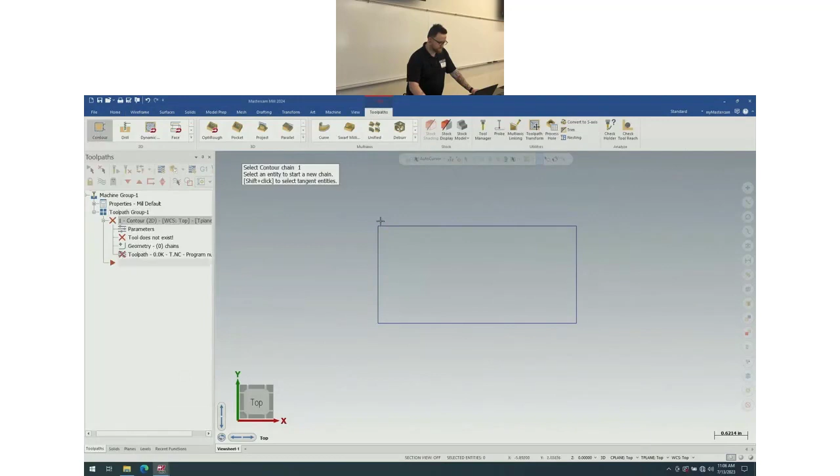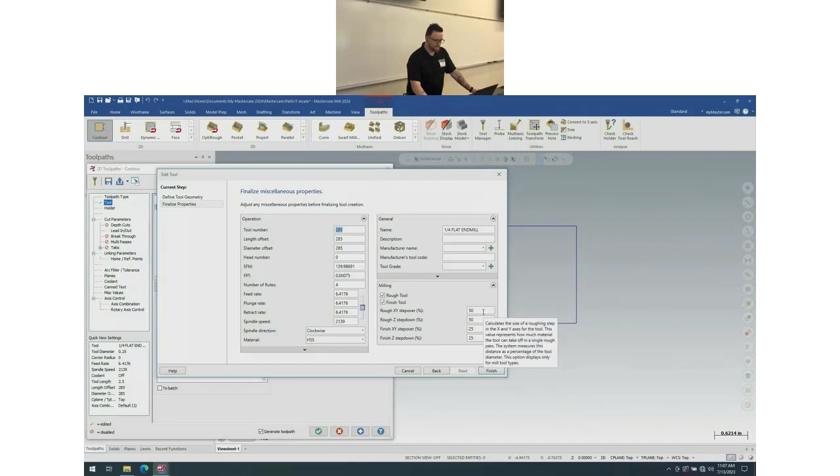Now for our tool, I'm going to grab a tool from the library, and this will just be a regular end mill, 1/4 inch. Now, if I look at the definition of this tool by going to Edit Tool, on the next page, in this lower right section, we have a couple checkboxes to tell it whether we want this to be a rough or finish tool, or both. And we can give it values for our rough XY step over, a rough Z step down, and then our finish XY step over and our finish Z step down. And this is as percentages of the tool diameter.

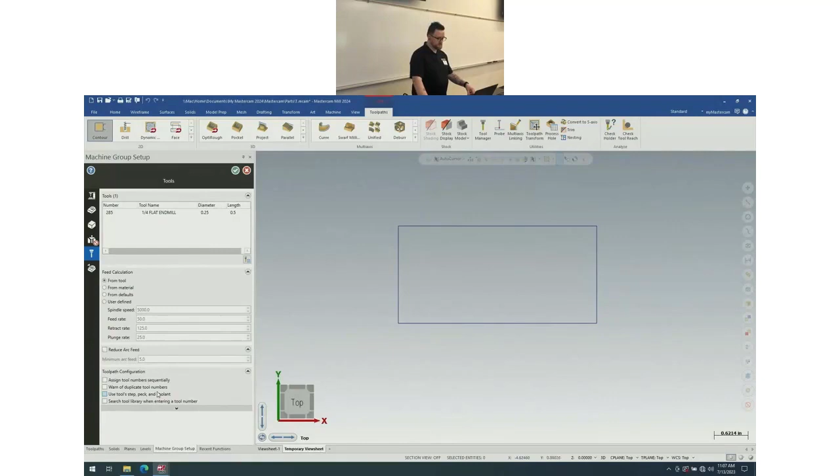Now, the reason that's important is because in our machine group properties, if we take a look in the tool settings, which is the second subgroup, that'll take us into job setup or machine group setup. And down in this lowest section, there's a checkbox here for use tool's step, peck, and coolant. So when you have that turned on and you have your tools all predefined in a library, you can pull lots of information in just from picking your tool.

So when you're setting up a tool library, consider setting up your tools in a manner where they're very specific. You don't use a general 1/4 inch end mill. It's which 1/4 inch end mill. What cut length does it have? Which manufacturer did it come from? What coating does it have on it? What material is it defined for? By having it down to that level, you can really dial in exactly what the settings should be for that tool. And in combination with this checkbox, you're going to get through your programming quicker.

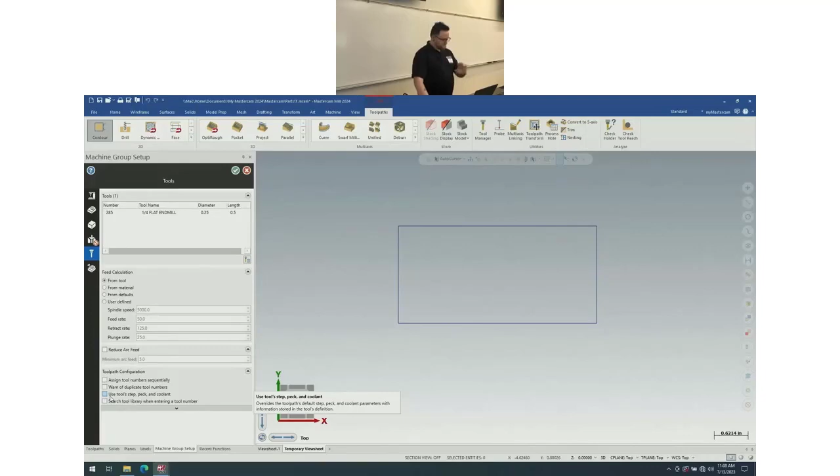Now, that's not new. We're still a minute off from getting to the new stuff, but I did want to mention that because I think it's important. Let's go back to the slides.

The next one is material libraries. Material libraries have been around quite a while, and they used to be pretty popular, but they've fallen out of popularity. The main reason for that is that the point of a material library was to take one tool and adjust its speed and feed based on which material you're cutting. And you did that by adjusting those feeds and speeds by some percentage value. And that worked pretty well when you had a carbide end mill that you used for every material, right? But we don't really do that anymore. That's not how carbide technology has evolved.

Modern carbide is dedicated. You have one tool that's for a fairly narrow band of material these days. You can use it outside of it, but it's not what it's designed for. So with that, I don't really use the material libraries anymore because I've found that just building tool libraries with the correct settings in there is a more effective way to go about it. Now, it's not to say they're useless. If you like that method, you can still use it, absolutely. I just don't think it's as effective.

But we did recently have a customer who had a laser machine. And what's kind of cool about lasers is that depending on how they work, they may not need any Z information. As long as you tell them what the material is, it can set a bunch of things for you. Well, we figured out that what we could do is in the material library, we could create a new material and give it a specific description with specific numbers and letters that are meant to work with that laser. And when you pick that material, it automatically could take that information, pull it into the post, and process it correctly to give that information to the laser.

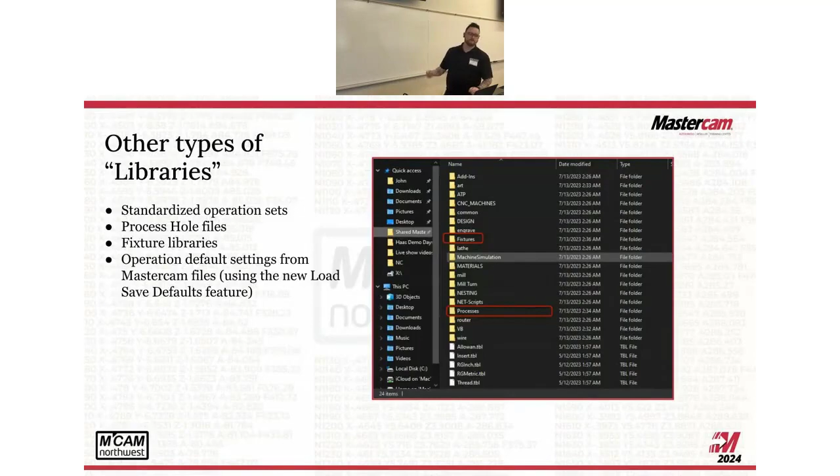Briefly, I do want to mention the Mastercam.com Tech Exchange. Has anyone used that before? No? All right. So the Mastercam.com Tech Exchange is a place you can go to online at Mastercam.com. You go to the community section and you'll find the Tech Exchange in there. The Tech Exchange gives you access to download lots of different kinds of files. You can get sample files so that you can test out things that CNC has tested out for themselves.

You can get tool libraries. These are predefined tool libraries from companies that are very detailed, very nice, fully written out. You can get component libraries. So if you're in a Mill-Turn environment, let's say you need to get a specific model for your tooling block for your machine. We call that a locator in Mastercam. A lot of times you can find those models right on the Tech Exchange. You don't even have to define it. You can just bring it in and use it.

It's great. So the Tech Exchange, while you can use it for full libraries, I don't know a lot of people who actually use a single brand of tool for everything that they do. That's a little unrealistic. But what you can do is if you know that you have some tools from this line of products and a tool library exists for that, well, there you go. Get the library and pull the tools you need out of that one and into your own custom library. Then you don't have to define all those tools, right? It's so much easier. So I think that's really the benefit of the Tech Exchange, being able to find pieces so that you don't have to do as much.

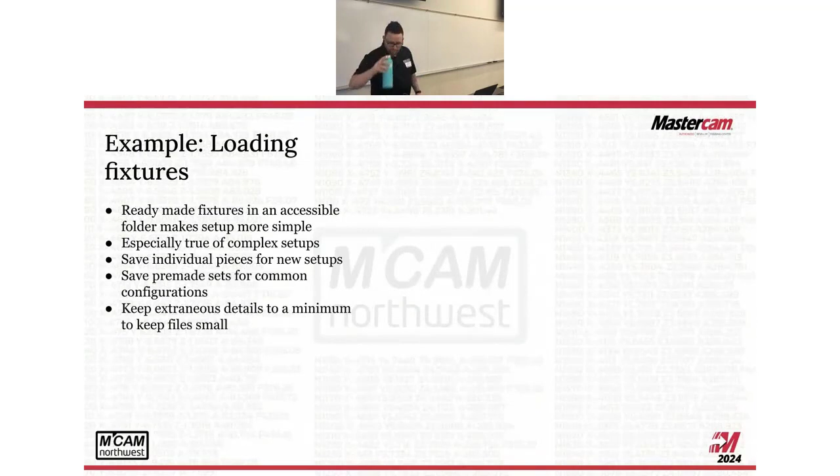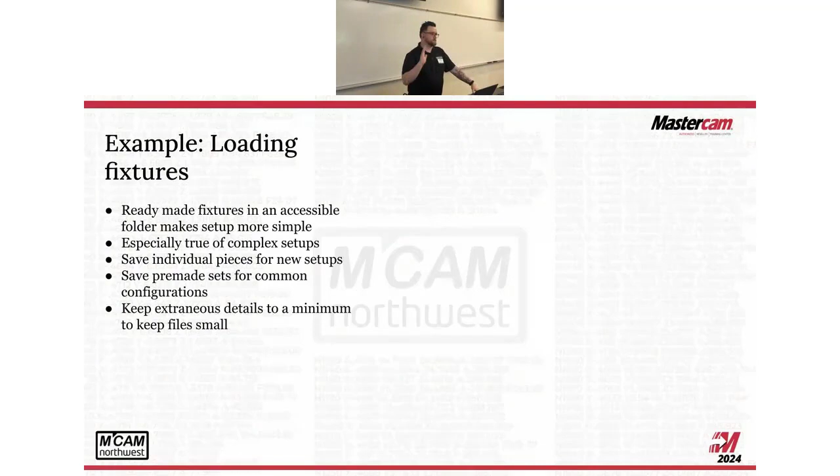So let's talk about loading fixtures. So when we're in the shop and we're making things, we need to put our parts in fixtures, right? Some kind of fixture, whether that's a vise or some custom-made fixture or something, right? But we need to think about the way that we store this information so that we can get to it effectively and use it effectively. So I'll show you the way that I've handled this.

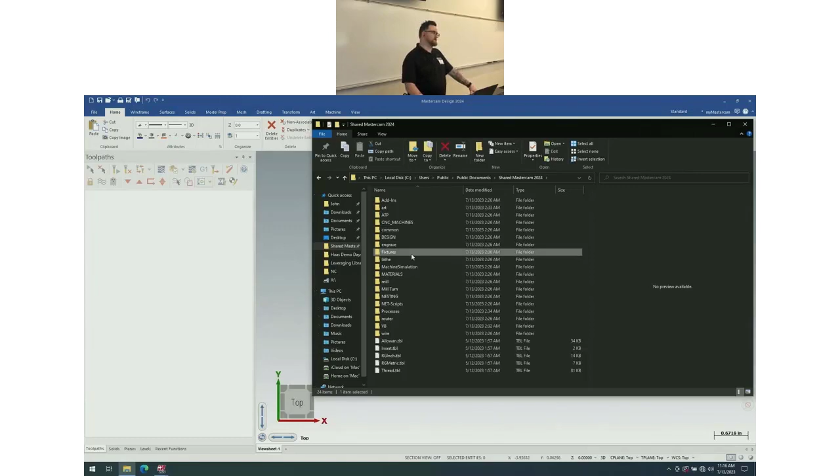I'm going to go to my shared Mastercam folder. And in here, I've got all my folders, and I don't know if you knew this, but you can actually create your own folders inside of the shared Mastercam folder. You are not locked out of this. I've created a folder here labeled fixtures. And if I go into that, I've got a couple of folders here. Now, at this point, this really starts to divide into how do you want to do this, right? But I'll show you my example. So I've got a couple of folders, one's for individual pieces and one's for standard configurations.

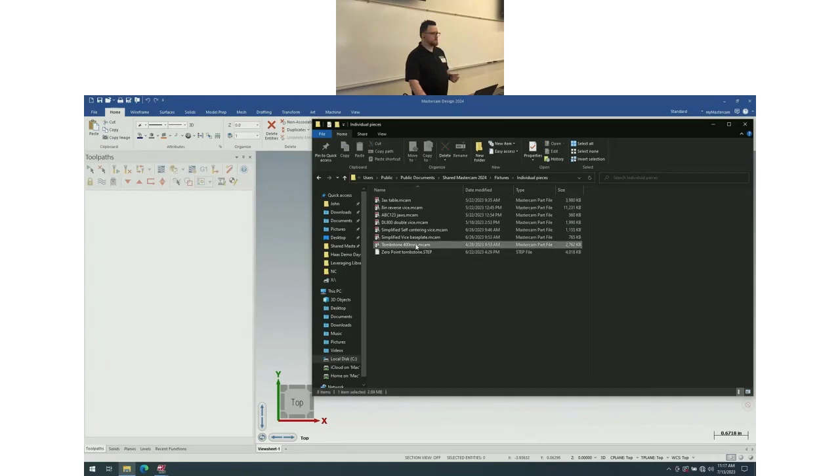So if I look in my individual pieces, I've got several files here. And so I might start with, I've got a new job and I know that I'm going to be working on my 4-axis. So I'm going to bring in my 400 millimeter tombstone. So I bring that in and here's my model. Now, I do want to point out that when you're saving your fixtures, it's a really good idea to try to limit the amount of detail that you have in your files.

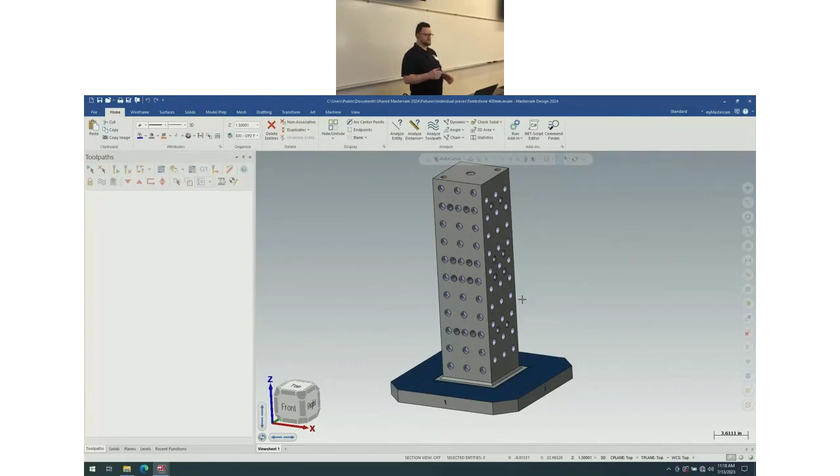Not too long ago, 2 weeks ago or something like that, I put out a tech tip about how that can affect your files. We had one version of a fixture that was something like 15 megabytes. And then the same thing with slightly less detail, but still perfectly good for a collision model, was like a couple megabytes. And it opened way faster. It wasn't 30 seconds, it was 2. So it makes a big difference. Here you can see it's pretty minimal, it's pretty basic. There's probably a little detail here that I could get rid of, but it's how much work do you want to put into it as well. There's a bit of a balance there.

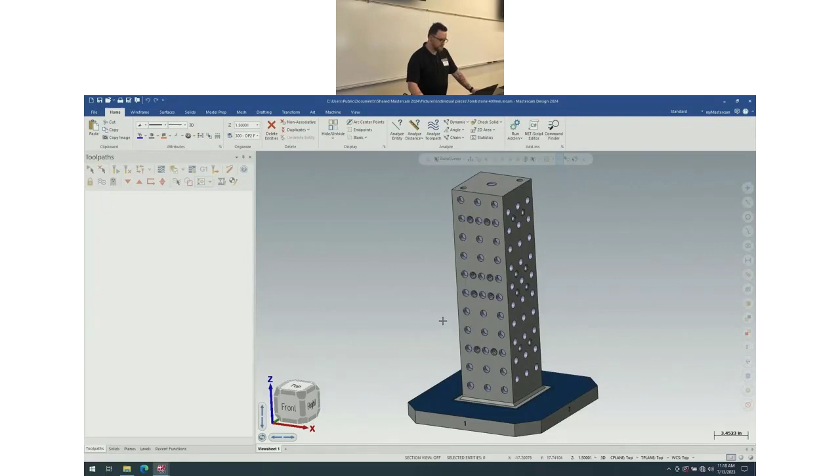So that's my first piece, and then I might want to bring more onto that. So I'll go back to here, and what is the next thing I want to add? Well, I might want to put my vise base plate on here. So I can hold Control, click and drag this down, and that merges my base plate in. Now in this example, I happen to have it in position.

A lot of times it isn't, and you have to move it around, and that's okay. It's not too big of a deal with all these tools we have inside of Merge. But this way, I can grab my pieces quickly and then just put them where they need to go, move them, rotate them, translate them as needed.

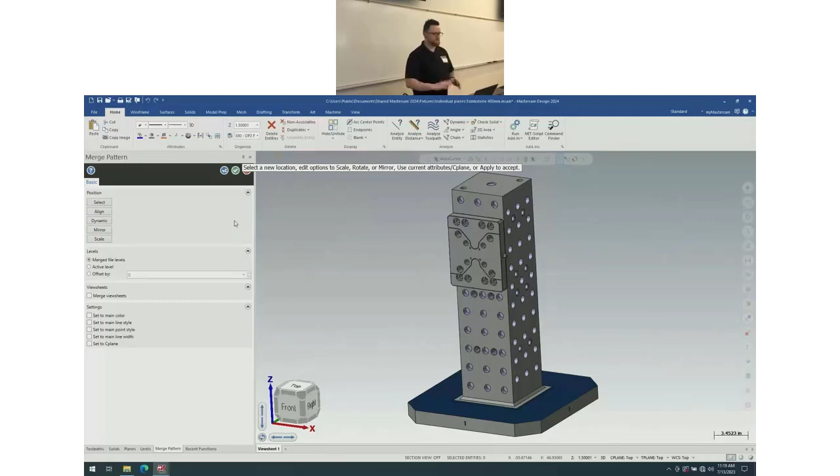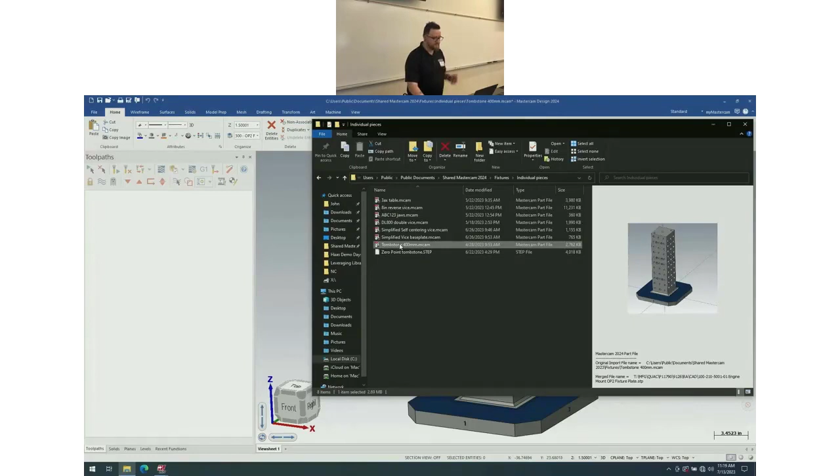So that works well for if we're building something totally brand new that we've never done before with pieces that we own. But if you run the same sort of standard configuration frequently, then save that as a file too. So in my standard configuration, I've got this built. And this file has 8 self-centering vices on subplates on my tombstone ready to go. And this works for tons of different jobs. So it's a good starting point for wherever I want to go.

At this point, I can bring in my model, put it in place, add some stock, and get tool pathing. Everything's ready. You can even go as far as in your planes. I don't have this set, but you could add in planes if you want to, if you have standard ways you like to manage your planes in here. So the idea of a fixture library is to just have your pieces ready so that you can bring them in quickly and easily and use that merge function to put everything in place.

Any questions so far? Are you downloading those things or did you create them yourself? So you asked if I downloaded those things or if I created them myself. Yeah. So it's a mix. Sometimes you can download them and sometimes you have to create them. It really depends on what that company offers. Some companies are really good about putting out excellent quality models that are on size, they're minimal detail, they're great.

Other companies, they'll give you a nice model, but they're really detailed. And then you kind of want to go through and pick those clean. That's what I like to do. Make sure to check out the tech tip that I did to see a little bit more on that. Or some companies either don't offer models, or if they do offer one, it's some horrible STL. And in those cases, you're going to build it yourself.

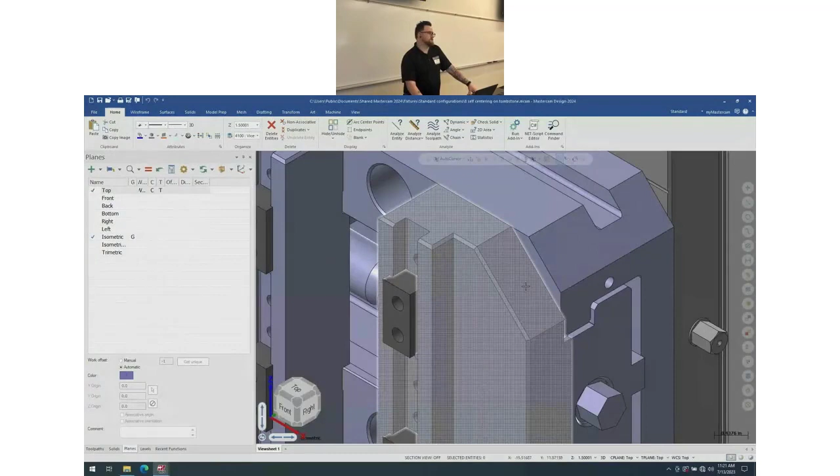But the thing to remember with fixturing is that you want to create a collision model. You don't need this to be perfect. You need it to be size accurate and where it needs to sit so that collision checking works. And that's really it. It doesn't have to be fancy. If this little corner cut right here isn't going to be critical to your operation, don't model it. It's fine. It's too much work. I try to keep everything as simple as possible. Does that answer your question? Yes. Awesome. Cool.

Okay, I think we can go back to the slides. So next up is standardized operation sets. Okay, so let's say that you're working in an environment where you make a similar part on a day-to-day basis. This is something that I resonate with a lot because my very first job as a machinist, I was working in this shop that made what are called wave solder pallets.

These are fiberglass boards that are pressed with resin, and then you cut a pattern out that has a shallow pocket for a PCB, deeper pockets that cover components that are mounted on that PCB, and then it's got through holes where you can have leads that are poking through the PCB, and then waves of liquid solder lap up underneath the board to solder those pieces together automatically.

We did so many of these things, it blew my mind. There were so many. And it was the same product over and over again. It was the same features over and over again, but every design is custom. Every design is unique. So there's a lot of people who do stuff like that, right? Similar work, but everything's customized. So in that sort of a case, I really like standardized operation sets because we can get these sets of operations, bring them in quickly and easily, and then modify what we need to get the output we're looking for.

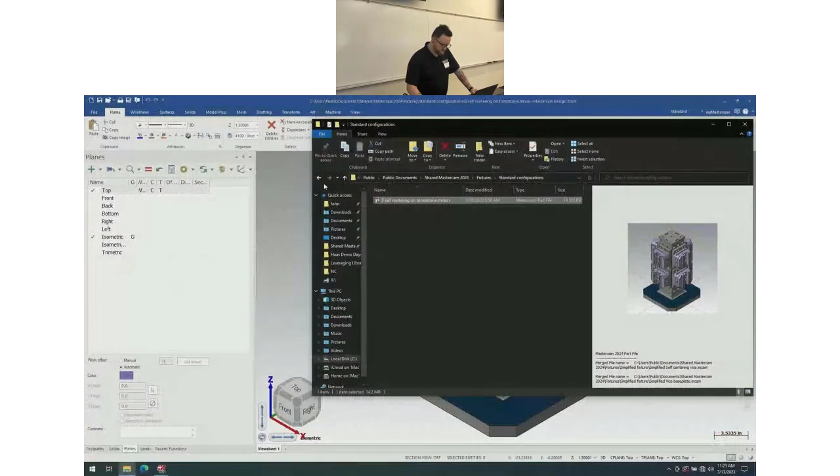And if you have an update to your process, you can update one spot and then everything from that point forward is made with that update. So I think that's a great way to go about it. Kyler, why don't we go ahead and go back to my screen while I find my file.

Okay. Oh, actually, you know what? I need to go here. So this is another example where I've created a folder in my shared Mastercam. I call it processes. And this has my operations set for wave solder pallets. So I'm going to bring this in.

And I want to point out that what you're seeing here is not super representative of what we're actually making. This is the bare bones of what we're looking for in terms of features. That's really it. You don't have to be complicated. You don't need a crazy part to do this. All I knew is that you generally have a shallow pocket that you fill in with the PCB. Great. Doesn't even matter how deep it is. As long as you have an even shallow pocket, it's good.

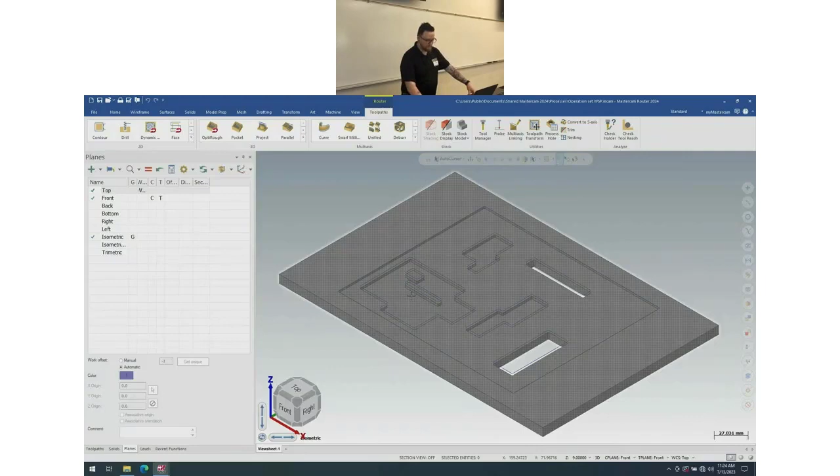Then you have deeper pockets. Some of those have islands. I know the tool sizes that we're using, so I might want to size some of those islands close so that big tools can't get in, but little tools can. And I have through holes. And with those through holes, I also wanted to make sure at least one of them was too small for my largest tool. So this was literally something I sketched out in wireframe in about 2 minutes that roughly approximates the types of features that I'm working with on a daily basis with these boards.

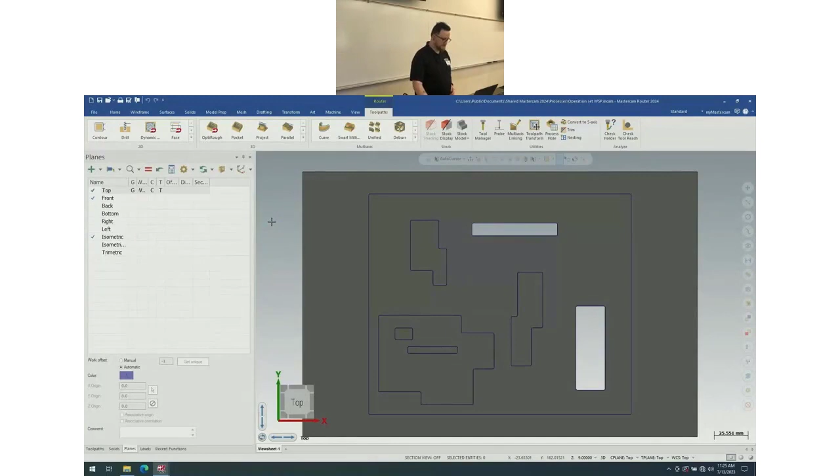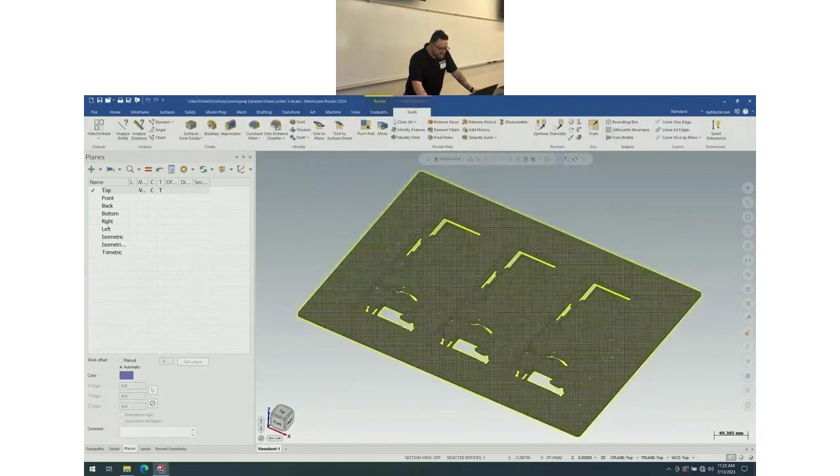So now let's go back to here, and I'm going to pull in this file right here. And this may take a moment to load. There's some data here. All right. And you know what? Let's adjust the color of this. Let's make it a little brighter, a little easier to see.

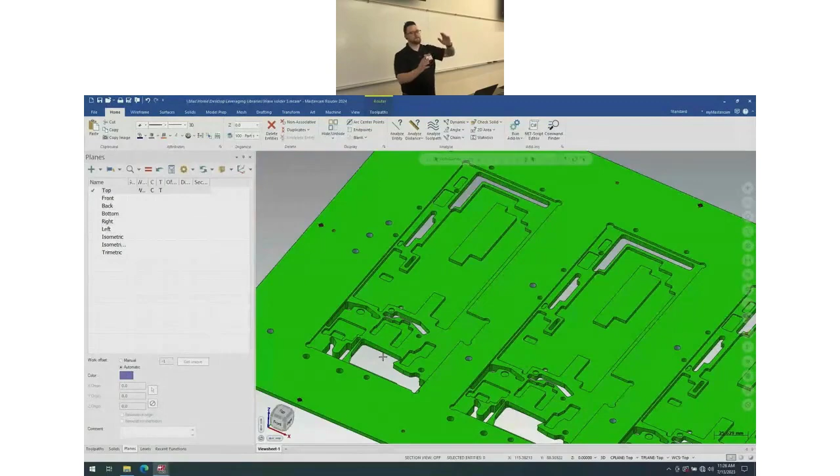So this is a more standard wave solder pallet. I've got a whole bunch of these features, but I still have one shallow pocket, some deeper pockets, some islands, maybe some even deeper pockets, and some through holes. But with the other one that I made and the toolpaths that I made that work for it, we can take those toolpaths from the first file, bring them in, reassociate our geometry, and be done with it.

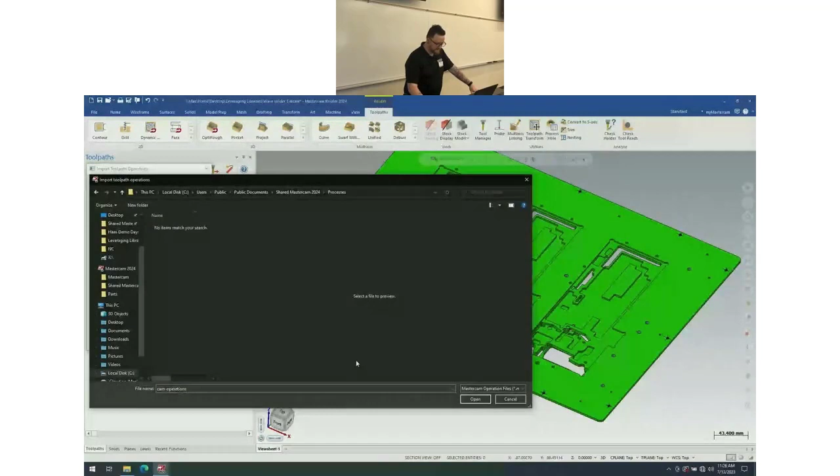So the easy way to do this, let's double check first. I want to make sure our stock is set up. Looks like it. Great. So I'm going to right click and import. I'm going to go to my shared Mastercam folder, find my processes folder. I have to switch my file type to Mastercam files, and then I'll find my operation set, and then I'll bring that in.

Now, I'll be clear. This is not a new thing. We've had import for ages, but I'm showing you a way that you can use this as a library to make it effective for you. I'm going to grab all those operations, hit the blue plus, say OK here, and close.

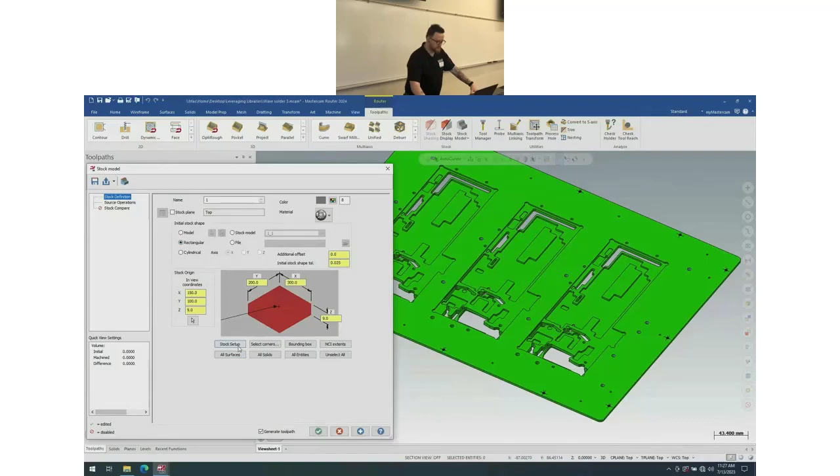Now, because I'm familiar with it, I know that the first thing I'd like to do is update my stock model to figure out the starting size of it. I want it to match my stock setup. So I'll say rectangular stock setup, green check. And it's going to give me an error because my previous toolpath isn't finished, and it depends on that. That's OK. At this point, I'll go into the geometry of my first OptiRough.

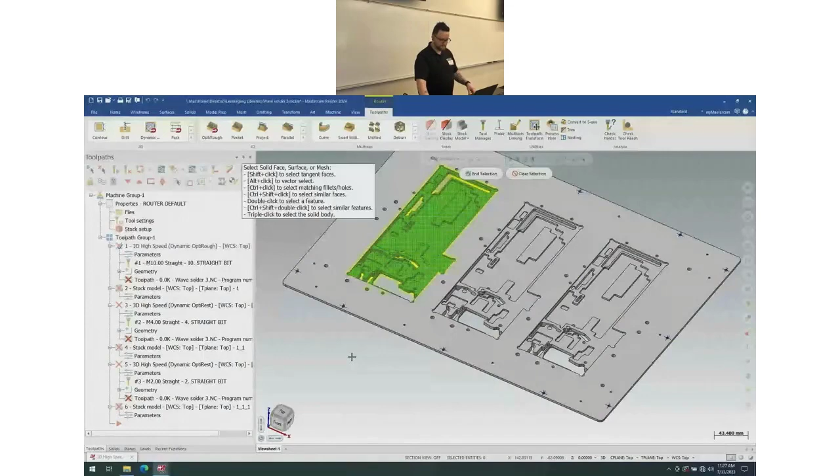I'm going to select entities, and I'm just going to double click this pocket. Because it sees that whole thing as a feature, it grabbed everything inside of that pocket for me. Then, under toolpath control, I'm going to add a boundary chain. And that's just going to loop around the outside, just like that.

Everything else in this toolpath was preset from the other file. My tool has been pre-selected, my speeds and feeds are ready to go. It's got everything it really needs. So if I hit the green check, that's going to regenerate, and it will create the operation that I need for that pocket for roughing, right? The first initial rough. And there we go.

There's some things it can't get into because the tool's too big, but that's what these other ops are for. I've got this one. It's an OptiRest with a smaller tool that's based off of this stock model.

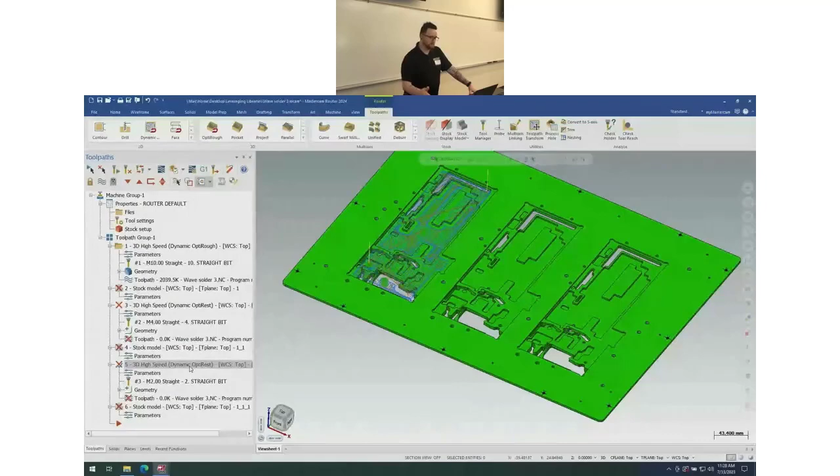Then another OptiRest with an even smaller tool that's based off of this stock model. And the reason I stop here is because this tool I know is small enough to hit all of the smallest radiuses that are put on these parts on a regular basis. So with that, I can just hit regen all dirty, and it'll take a moment because this isn't the fastest computer in the world. But, oh, I did forget a step.

Oh no, I forgot a step. Here we go. So I'll show you what I did wrong. The other toolpaths still need their geometry. The good thing is you can actually right click and drag the geometry from the first operation to the second one, then click on replace geometry. It will bring in the machining geometry and the control boundary. I'll do the same thing to the last one because they're all going to use the same geometry, and then regenerate.

Now it's working. So what I like about this method is in a few steps, I can have all of my roughing done for any board like this, right? It doesn't matter what the specific board is.

It doesn't matter. Shelly, could you get that over for me?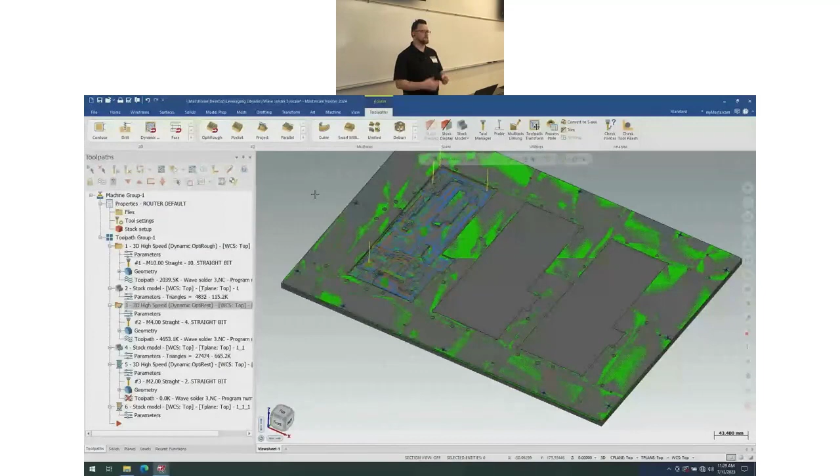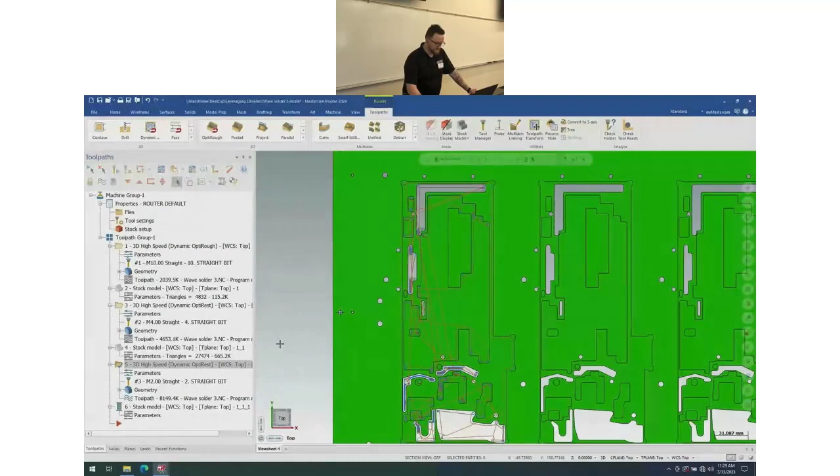It doesn't matter what the specific dimensions of this are because I know how the parts behave overall, right? I have a standard flow for how I work. We know what the standard types of features are. So we have our 3 here. There we go. So from our top view, we've got our second tool that comes in, cuts everything that the bigger tool couldn't get, and then again with an even smaller tool. So by the time that stock model's done, we're ready for finished contours, pop a couple holes in it, and we're done.

So with a quick computer and some good operations preset, I could probably have this entire board programmed in less than 10 minutes. So I think that's pretty good, right?

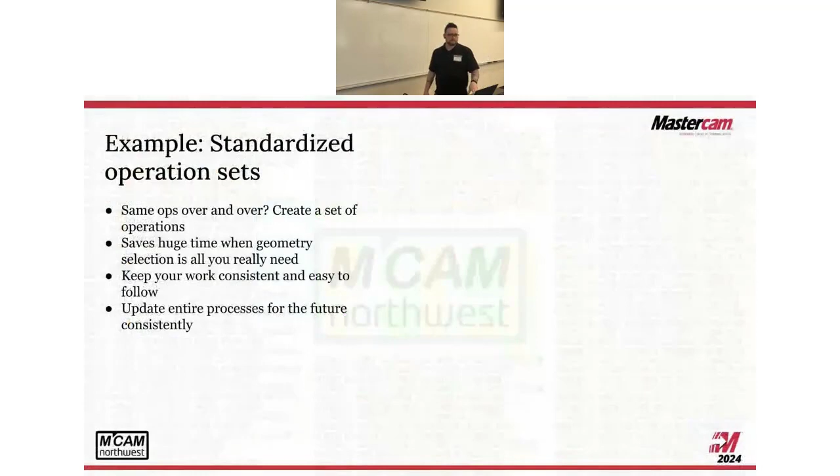So next up, loading saved defaults. So this is a feature for Mastercam 2024. And like I was saying before, loading your defaults is something that we've been able to do, but now we can load defaults based on other files. And that's really cool. So this is kind of like import, but it's a little bit smoother, and we don't have to go do as much searching, especially if we have some pretty standard files that we're using for our starting points.

So if you have known good settings for your approach, you know what tool you like, you know what kind of speeds and feeds you like, you know your step overs, your step downs, all that kind of stuff, your pattern options, all of that can be preset. And I'm going to show you an example for Mill 3D, but this works for anything. This can work for multi-axis, this works for mill turn, this works for turning, this works for wire, doesn't matter. So yeah, fantastic time savings on this, and I really like this interface. So I'm going to show you guys how this one works.

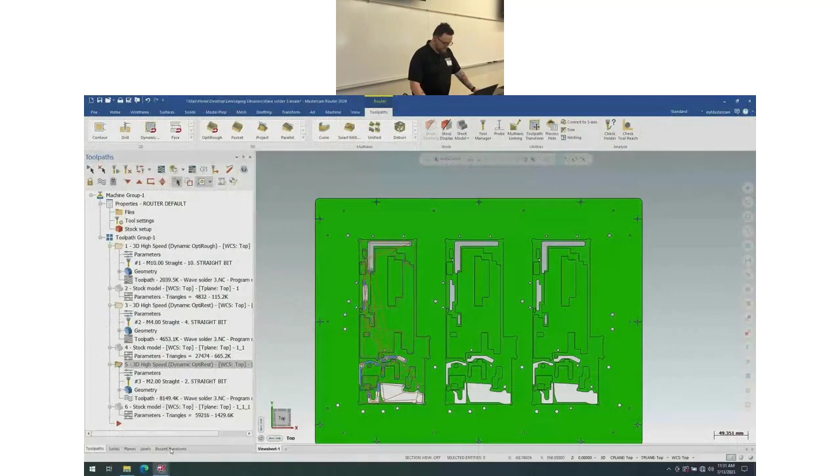All right, so I'm going to bring in this file. So here, all I've got so far is a part in a fixture, and I've got a stock model on there just to give me kind of a starting point. And what I want to do first is do an OptiRough from this orientation right here. So I'm going to start an OptiRough toolpath. Now, before I do anything else, I'm going to come up here, and this button right next to the floppy disk icon allows me to choose a file to load my defaults from.

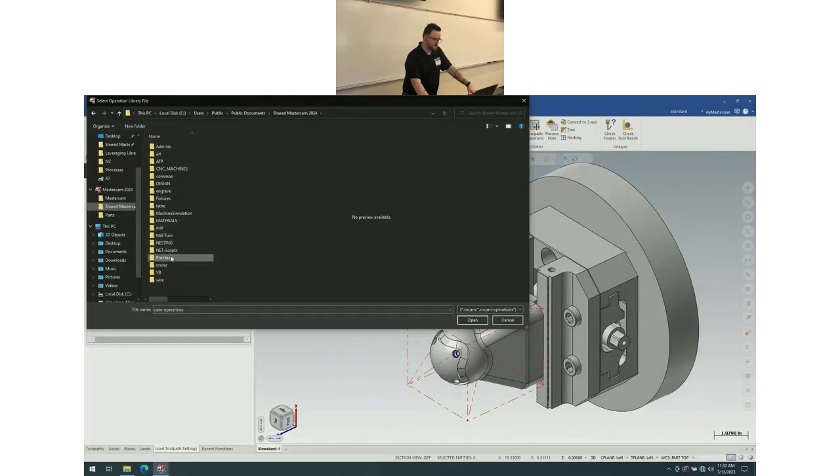So if I click that, we have a radio button selector between default or custom. So default is going to pull the default values from your operations default file. But if we select custom, we can pick any .mcam-operations or .mcam file. So even a standard part file. So I'm going to change my selection here. I'm going to go back to my shared Mastercam folder, go to processes, and grab my, oh, actually, you know what? I had this in a different spot. Here we go, default parameters.

So when I load that in, what this did is it found any operation that was an OptiRough that was in that file. And with that selected, it says, what do you want to do? So here I have 3 possible settings. I have OptiRough standard with stock. I have Opti large step down, small step over, or Opti large step over, small step down. So these are different toolpaths that I built in the other file for standard approaches that I like to take for this type of work.

So with that selected, I'm going to choose the first one, OptiRough standard with stock. When I click OK, this has changed every parameter in this toolpath to match that other one. All we need to do is make sure to double check our tooling. So this is going to use a 3/8 bull end mill. And then we need to reset our model because it won't select your geometry for you. Otherwise, it's the exact same toolpath from the other program, right?

That's not very useful. So we'll make our selection. We'll triple click here. I'll probably want to add some avoidance as well, just in case. And steep shallow, I'll probably want to add this in too. Now this is something you could add into the default parameters. If you know that you do this type of work frequently, add steep shallow in as one of the options. I'm going to set this to just go halfway down the part, call it good enough. Everything else in here is fine, and I should be able to just regenerate.

All right, I think that I made a mistake because I tried to push it through without the stock, and it did not like that. That's okay. So we can pop this through again. Again, what's really nice is once I've selected it once, I can hit this drop down, and now I can just pick my options here. So if I wanted that option, select my model. We'll just use remainder, actually. There we go. It's easy.

Set up our stock. Double check our tool. Looks good. Yeah, it likes that better. There we go. There's the little circle. Bottom of the stock is above maximum depth. Yep. Okay, and that's fine.

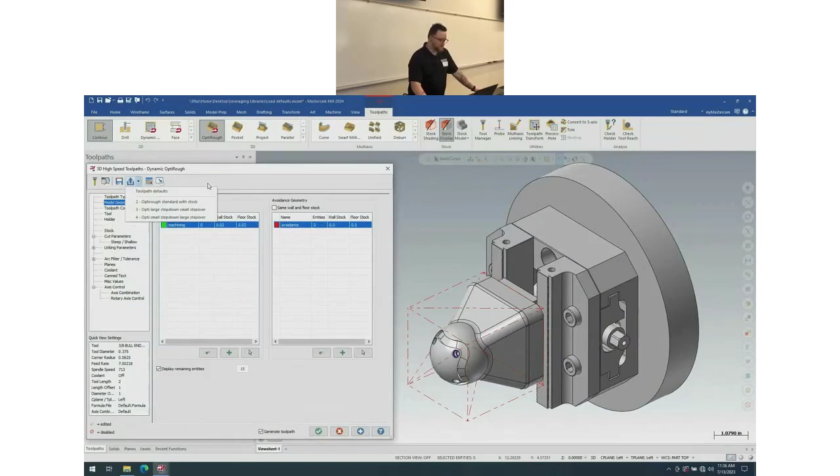So this is a way to quickly bring in all of those settings, right? And what I like about it is, again, being able to just select a different way to do this, really nice, because instead of having to create a new operation or having to fiddle with every setting, I can just go in here and pick a different one. And that's even true of an existing op. So once this is done processing, I can go into my parameters and say, you know what, I don't want to do this with an end mill. I want to do this with a high feed tool.

So in that case, I might choose small step down, large step over. So I'll pick that. And now all of my settings are different. My cut parameters, I've got a much bigger step over here. My step down's tiny. I can choose my different tool, my high feed tool. It turned my stock off. So maybe that's something you like. And then you just make sure to reset the model geometry. That's all you really have to do.

So that's the gist of how loading saved defaults works. And I think that if you take the time to really set this up in a way that benefits you, then you could save a lot of time. There's no magic bullet with this. I can't give you a file that has all of the strategies because it's useless, right? It only works if you set it up. You have to take the time to do it.

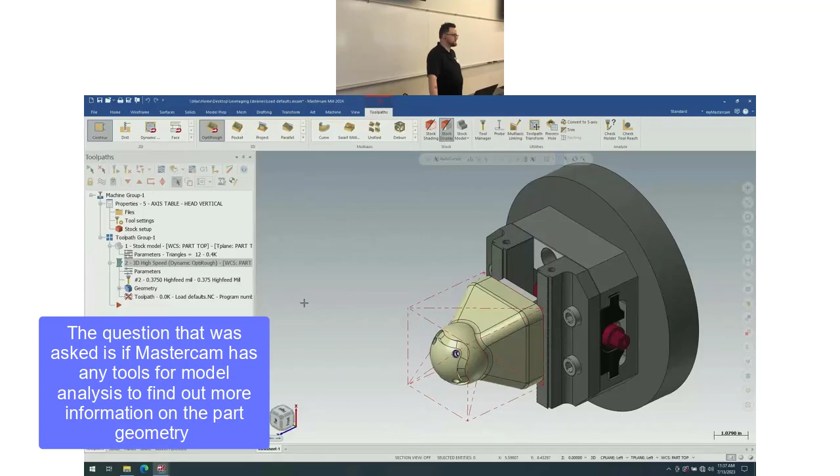In regards to that, I use a lot of templates, but part of the problem is figuring out what is the smallest radius on the model, what are some of the features. Do you have any model analysis to figure out what is on the part? Yeah, there are some tools within Mastercam that do that. So we have in here,

let's see, so dynamic is a little bit manual, but we do have things like analyze draft angle. So if you're looking for what are the draft angles of my part, you can use this, and from a given plane, it can tell you what those draft angles are. So that can be useful if you're trying to figure out, should I be using a tapered tool or should I be stepping this up, right? Do I have a tool that works for this?

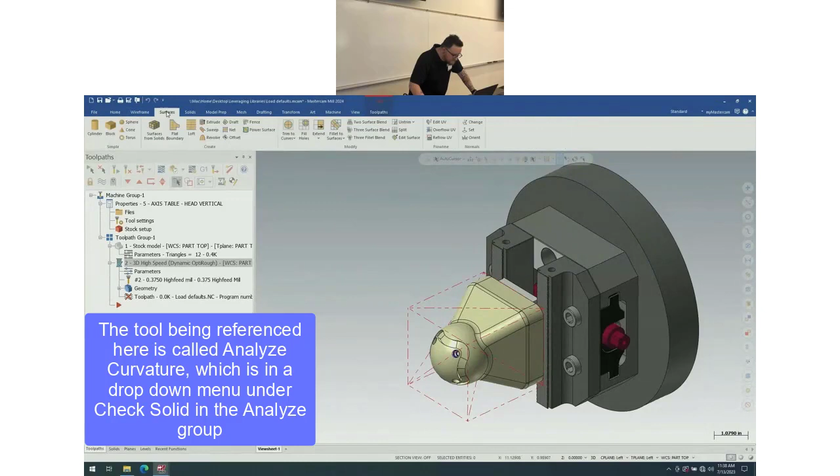There's also some other tools in here that allow you to do things like find the smallest fillets. Yeah, that's a good one to know. Yeah. So let's see here.

I don't always remember all of these tools myself, I'll be honest with you. Yeah, that's something I use a lot because it's nice to have the templates made, but if you don't know which one to implement, are you just clicking through templates? Right, exactly. No, it's good to know what is going on with your particular model. So I do know that there's tools for this. I just can't remember where they are. If Tim happens to be watching, he might put something in the chat and we'll go back over it. Otherwise, I can reach out to you by email afterwards or put this in the recording afterwards as well.

All right, Kyler, if we could go back to the slide deck. I think we're just about to wrap up the examples here. There we go. Process hole. So process hole is another new feature for Mastercam 2024. And it allows us to take a hole that is defined as a solid hole, so not an extrusion, and we do need to have the history on that. We can take that, and with that information, if Mastercam knows what that definition is, based on another file and the same definition of a hole, we can bring in a process. That process can include multiple toolpaths, which I really love.

That means if you're making a hole for a socket head cap screw, and you need to spot this, then you need to drill it, then you need to take an end mill and do your counterbore, and then you want to take a chamfer mill and pop a small chamfer on top. That's 4 operations. As long as you save that as a process within Mastercam, whenever that same hole definition comes up, you can use this tool, say, pick this hole, go, and it will add all 4 of those operations automatically. It doesn't even matter if they're at different depths. It can account for all of that because it knows the solid history.

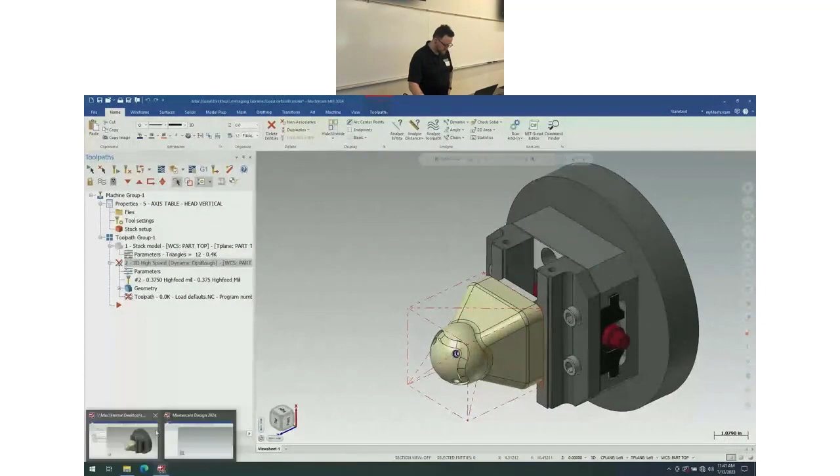So with process hole, I will say that in terms of getting programming done, it's probably the fastest tool out of all of these that we've seen today, but it's also one that takes the most heavy lifting to set up. It is definitely a bit of work, but if you have any standard holes, this is golden. Absolutely wonderful. And does this work with most file types? Like a step file will also be able to use process hole, or is this only for things that have history essentially on the build? So your question was, does this work with any kind of file or does it need to have history? So it does need to have history. However, just because it came from another system doesn't mean you can't have history. You can add history to a model.

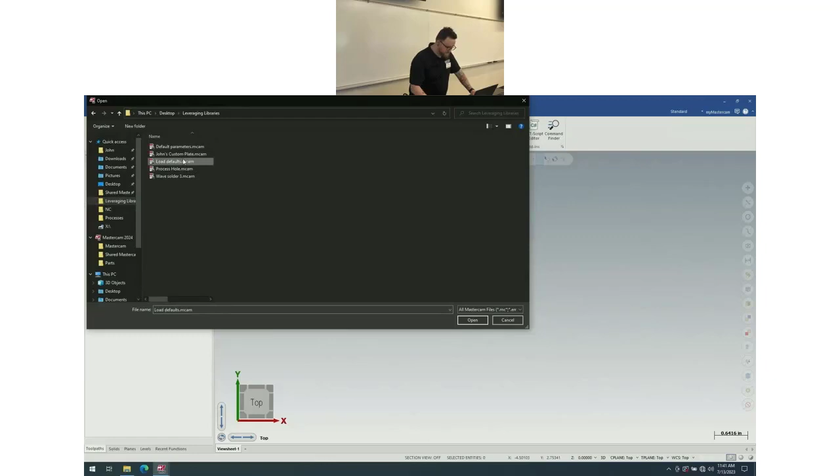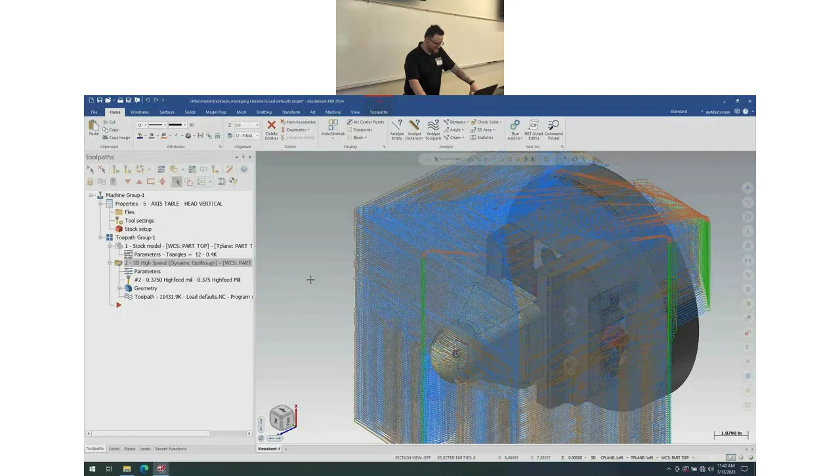So Kyler, if we can go back to my screen for a sec here, I am actually gonna kill one of these Mastercams and go to the other one. All right, so I don't actually want to open that one yet. I'm going to open a different one here. I want to go back to that file we were just working with, because this even works in multi-axis, which is pretty cool. It's the analyze curvature tool. Analyze curvature. I don't know where that is, but there is Command Finder. Oh yeah, that's where I screwed up. That's why it was taking forever. I forgot the steep shallow.

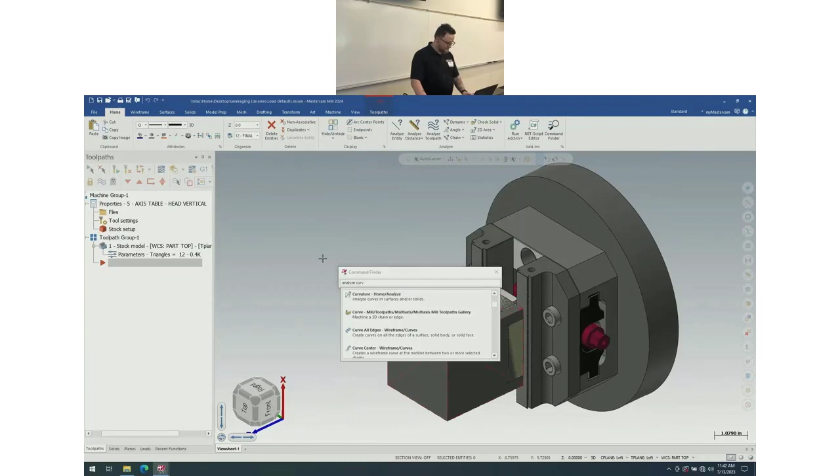Yeah, analyze curvature. There is a command finder. So if we go in here and go analyze curvature, should be in here. Here we go, curvature, home analyze. So that is something that could give you like your fillet sizes, for instance. All right, so kill that.

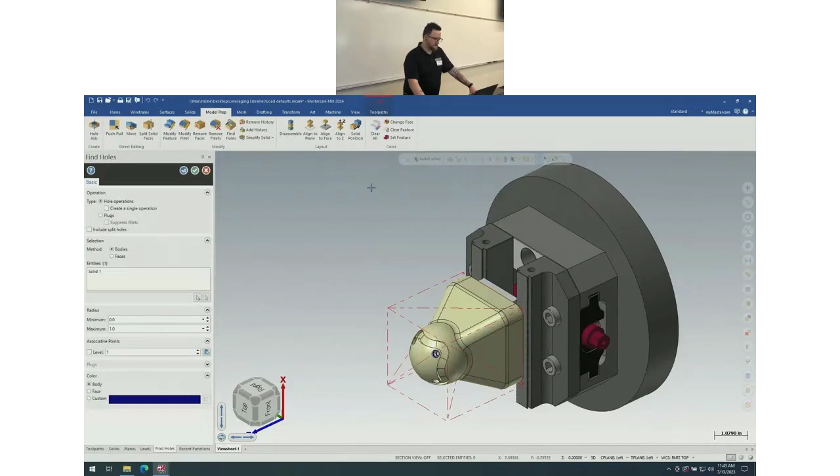So let's say we have this part here, right? Let's go take a look at the solid, and the solid body itself. Which one is it? It's probably quite low on the list. Okay, so this is the body for this part, and there's no solid history here. This is a dumb solid. So this could have been brought in from another system, could have been an STL, whatever. So from the model prep tab, you can go to this feature for find holes.

Then we're going to select an entity to find holes on, and selection here. And then up here we have some options. So we're going to create hole operations. You have an option to create a single operation. This means if you have multiple holes that fit the same definition, then you can combine them into a single history operation.

That's really useful if you have like an array of holes that are all the same. That way you don't have them all separate and, oh, I need to make a change to these holes, let me do this one at a time, right? That would be awful. So this lets you combine them. So in this case, we have like 4 holes, the front, these counterbore holes.

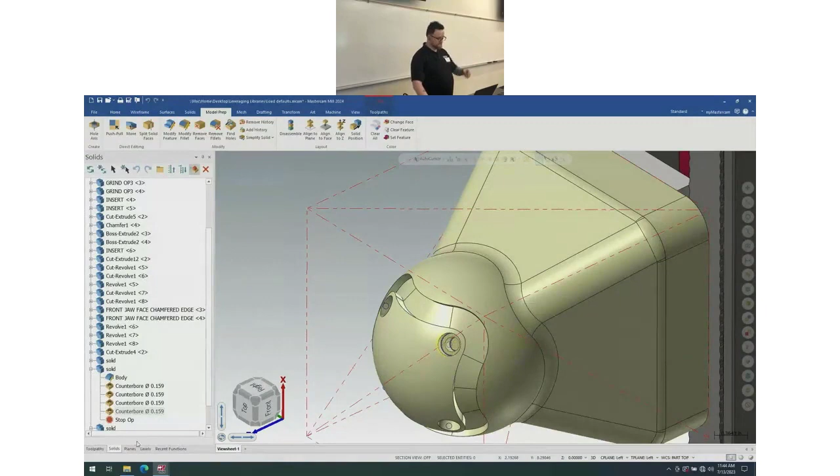So I'm just going to let this run. And it found 4 holes detected in the body, right? So now I have these 4 counterbore definitions. I can double click into them, and they act just like a normal solid hole function. So if you are working on a model that doesn't have any history, that's the tool you want to use first.

Does that answer your question? Okay.

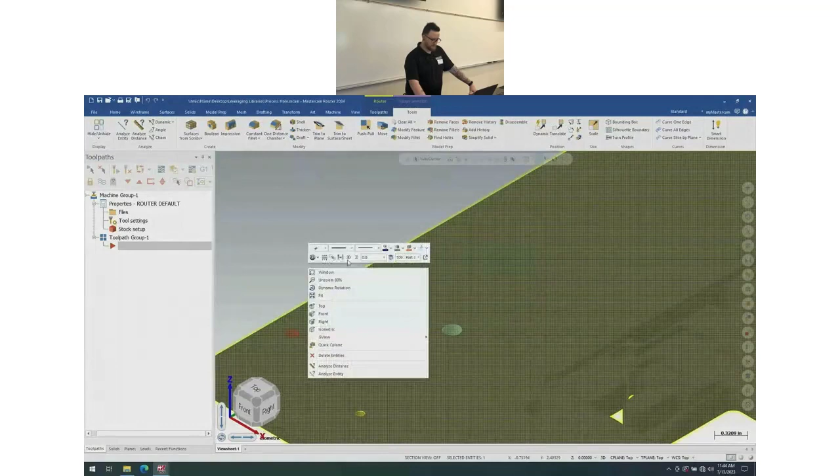So now let's come into this part here. Now I'm using the same part as I did before, but for a good reason. And this one's slightly different in that it's actually a different size a little bit, I think. So I'm going to change my model color again because I do actually like that green. That's nice. Okay, so if we look closely here, we'll see that there are 3 different colors of holes that I want to deal with.

We have a red one, yellow, and blue. So the red holes are going to be basic. I just want to punch through them. I don't care. As long as they're roughly on size, we're good. The yellow ones are going to be drilled and then tapped. So I want to make sure that I have both of those operations. And then the blue one is going to be drilled and then reamed, right? And these are operations that you might do frequently if you're doing parts like this all the time, standardized holes.

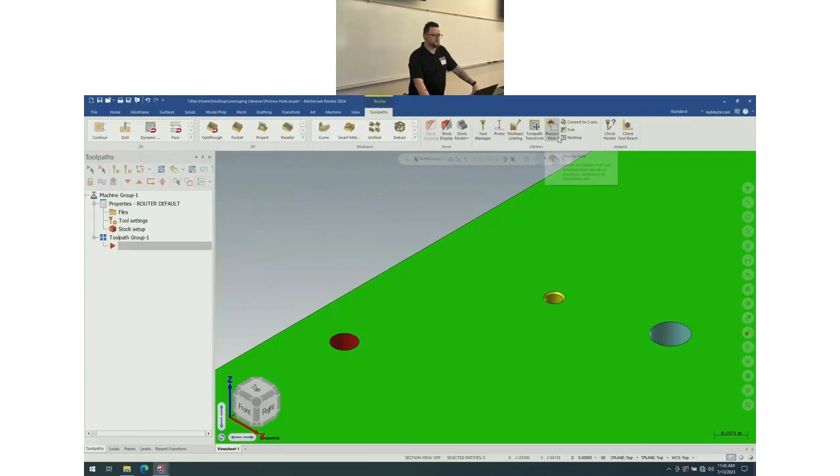So what you can do for this is you can go up to your toolpaths, and over here you have process hole. And from this, what I'm going to do is hold control and then click this red hole. It's going to find all of the other holes that are within the same solid history item that match. So we got those. Then we go to the process tab, and I want to select a different library. So I'm going to go to my processes folder and select my process hole template.

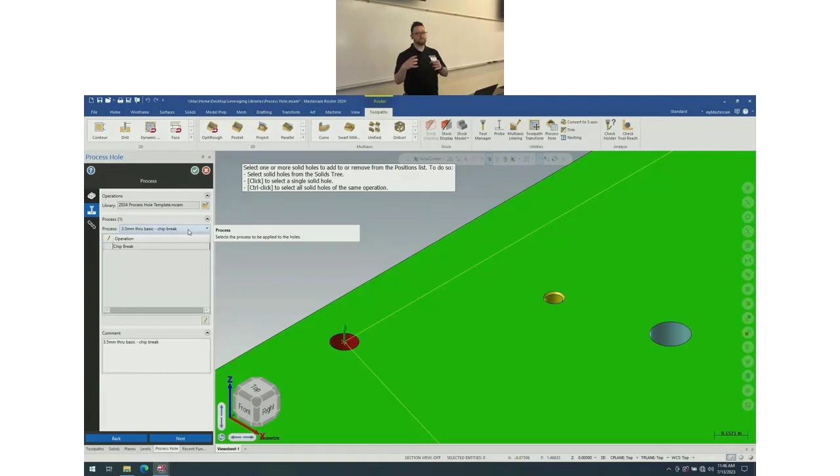Once I do that, when it loads up, we should see this update. So here it found a process. So this process is a toolpath group within that other file, and it has been labeled for this type of hole. It knows that that process was tied to that same solid hole history type. So it's got the same diameter. If it's got steps to it, the steps all match, the chamfers. This is why it's a little more work to set up, right? Everything's got to match exactly. But when it does, it makes this very easy.

So it found that we have a chip break toolpath. Like I said, it's a simple hole. So then I'm just going to set this up as a basic minimum clearance, part clearance 100 thousandths, green check, and we'll just allow that. Okay, so that was pretty straightforward. It's just going to drill it, right?

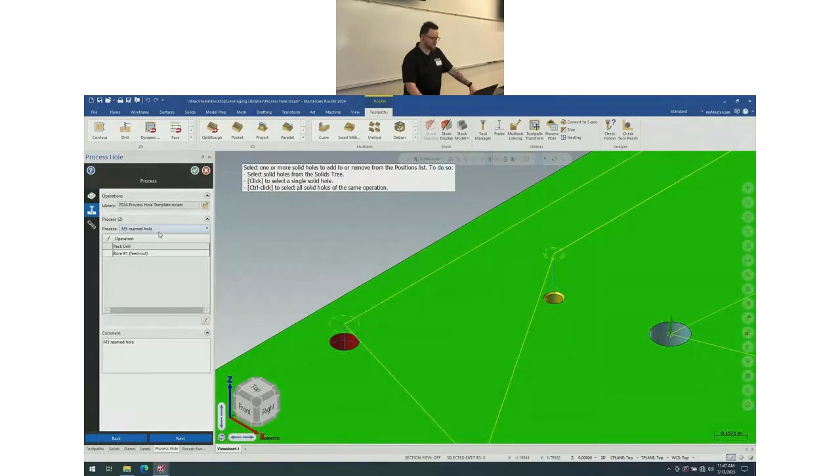Now let's talk about the yellow holes. We're going to do process hole again. And I'm going to control click, finds those. We go back over here, it pulled in the same template file, and it found a different set of operations for those holes. This has got a chip break and a tapping cycle for 2.5 millimeter holes. Say okay here, and that adds drilling and tapping to those holes.

One more time for the blue holes. These are going to be reamed. So this is an M5 reamed hole, peck drill and bore. And done. So, whoops, very sensitive mouse. So all of those holes on screen, if we grab this entire group, all of those were programmed in just a few seconds because I had a process hole ready to go. So if you're willing to spend a bit of time putting that together, it's definitely worth it.

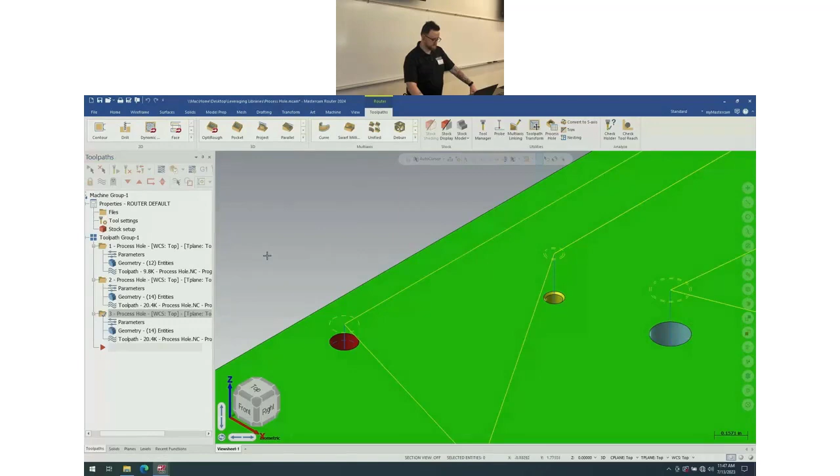Okay, so there we go. Using libraries for quoting. So if we take everything that we talked about today and use them in combination, I'm sorry, what's it? We have a question. What's the question? The question is, is there an advantage to using Process Hole versus importing a Mastercam file that has the entire sequence of operations?

Yes, so the question was, is there a benefit of using Process Hole over just importing a bunch of operations? And one of the big benefits is that you only have to select the geometry once. If you do the import, you have to pick the geometry for each of those or do the geometry replace, which is a lot more steps. Number two, Process Hole is a little bit more flexible in terms of if the depths of holes are changed, it's more effective at actually picking that information out because it's using the solid history.

And then the third point is that it is easier to use for multi-axis. If you have multi-axis drilling, it is easier than trying to import. It's got settings. The settings are baked in a little bit better. Did we have anything else? Nope, that was it. Any other questions out here? Oh, nothing? Okay. All right, so using libraries for quoting.

So if we take everything and we kind of put it together, what we get is a set of files, operations, and processes that can be used to program basically anything in our shop quickly, right? Whether you have an operation set for something you do frequently, or if you just know your tools and materials pretty well, and you could be making anything, you could import the defaults, right? Or, you could use Process Hole. If you're doing a lot of holes, you can get that sort of thing done.

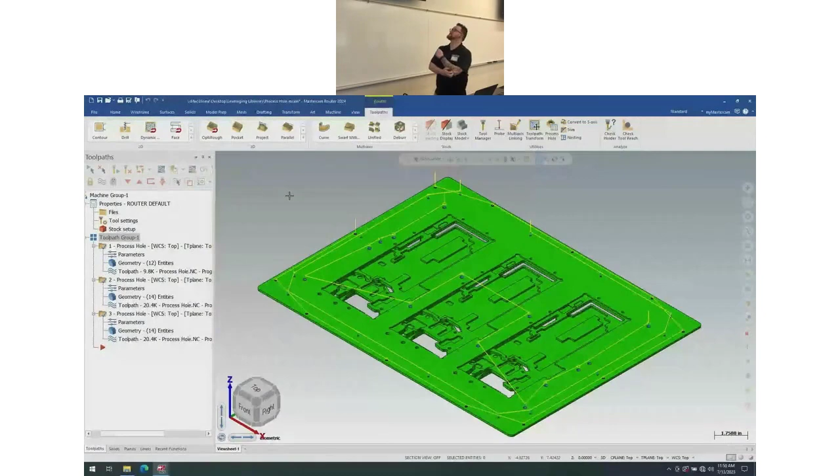Kyler, move forward. And with that, are there any other questions? I would love to sit here and talk with you guys. Bye, Shelly. Do you guys have any other questions? Even if they're unrelated, that's cool. Anything in chat? Good job and great info. What's that? Good job and great info. Oh, okay. How is yours?

So I'm setting up on a 5-axis, frequently dovetail the blank to get an initial grip. How do you go about setting up your stock model efficiently? Because we have to make stock for every single part, and it kind of matters centering the dovetail in the blank or offsetting it, and all of those clicks involved in creating that initial model. Is there any time savings that you have? Sure. So the question is, and I'm repeating it so that they can hear the recordings and all that.

So the question is, if you're doing a lot of dovetailing, for instance, and you need to make sure that that is represented accurately in a stock model, is there a way to do some good time savings? I would say yes, there is. Kyler, if you want to go back to my screen for a second. Now, I don't have anything pre-built for this because I don't set up a lot of 5-axis machines myself.

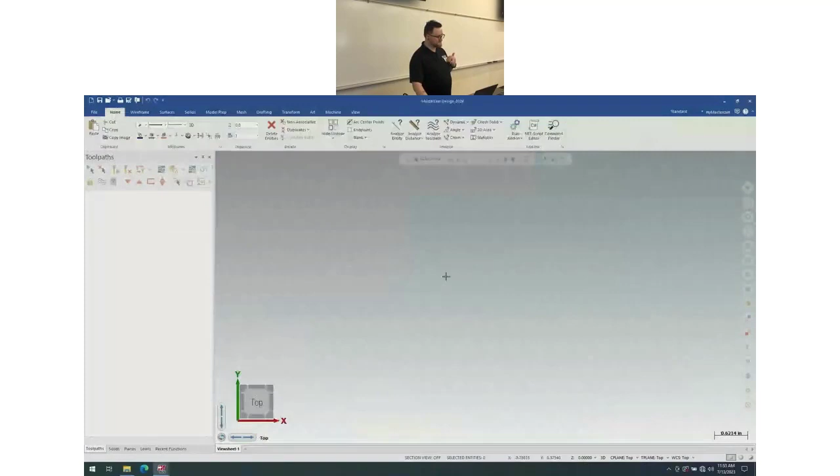And then you have some block, and it's way taller than this or whatever. All right, and then we'll trim everything together. Okay, so if you have some standardized widths of your dovetails, say something like this, where you can just take those angles and shift them around as needed, then create the rest of your profile and extrude that into a solid. That can be used as the basis for your stock model.

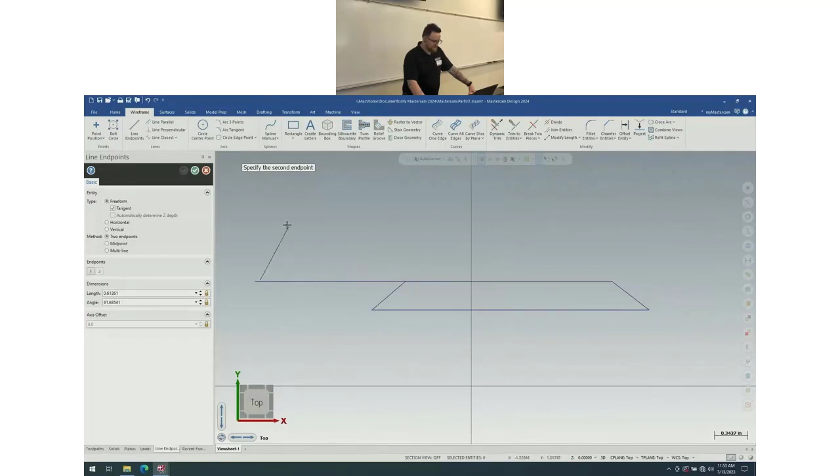So just by having a sketch that's similar to what you're looking for, that's quick and easy to modify, I think that's a good way to do it. You can highlight and use dynamic transform, snap it, and then you can just use a reference point or something to get the width that you're looking for. Then you just use trimming tools to trim everything back up. That's not bad.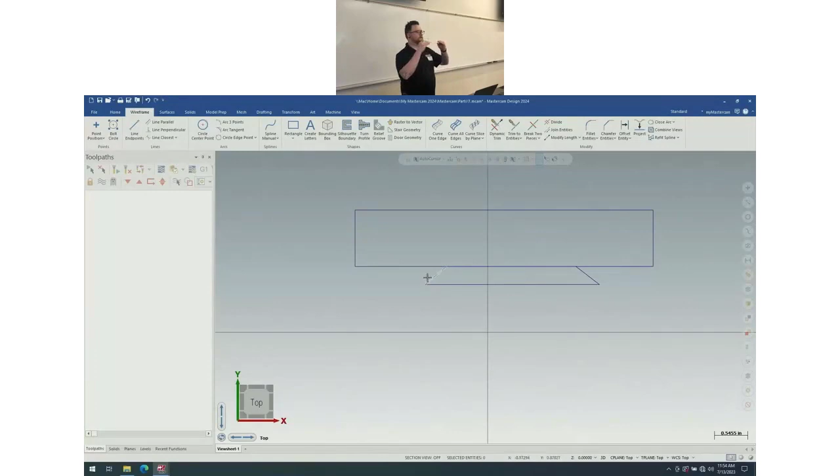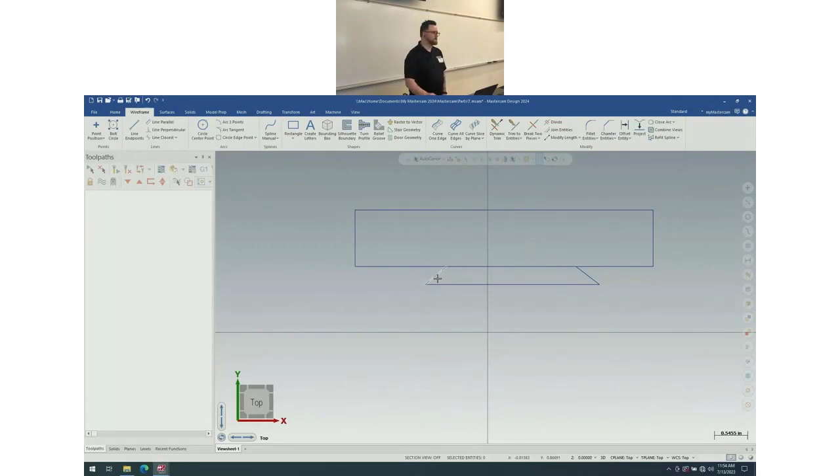You don't have any parametric modeling as far as user parameters? I'm going to be honest, I'm a Fusion user, so I'm in the wrong place. But there's plenty of parametric modeling within Fusion. If I have a pre-extruded geometry, I can go back to the sketch, but within just a separate function form. I labeled this dimension as dimension 2, and it is stock width. I can type any number in there, click generate, and it regenerates the stock at whatever stock width.

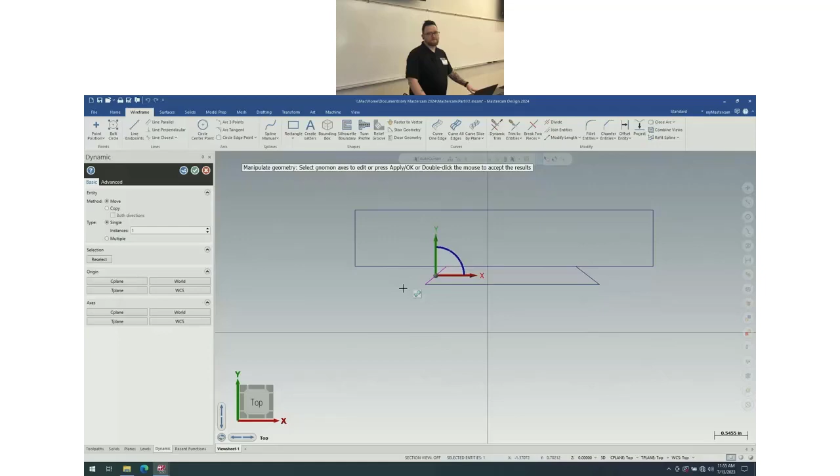Are you guys utilizing any of that function-driven modeling? Yeah, so we do have associative modeling, and it does the same thing in a different way. As opposed to having some dialogue that's a bunch of fields and forms, everything is visual with Mastercam. We program things visually. Are we still showing? Cool. So I'm going to go to solid, extrude, pick that, and flip that around, and that's my solid.

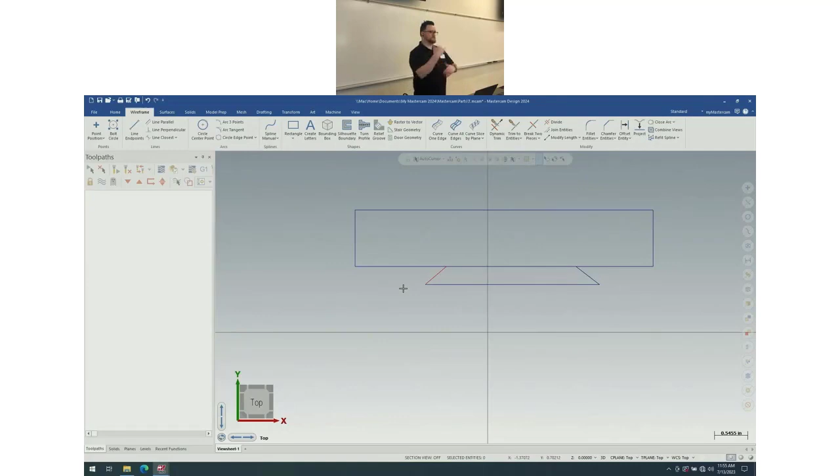Now, if I wanted to modify this, I can just modify the wireframe, and then the solid can update from there. For instance, I can go to my transform, and go to stretch. Select those, pull this up to there, green check. Now, if I go to my solid, you'll see that the solid doesn't follow the wireframe, but as soon as I regenerate, I'm good to go. So you can modify your wireframe in any way you like, and as long as that chain still exists and you haven't broken it, the solid can regenerate itself.

Does that make sense? Yeah, that's pretty good. So in one way, it doesn't give you the fields that you're looking for, but in another way, it gives you more flexibility because now I can go any way I want with this, as opposed to having fields that tell me which way I can go.

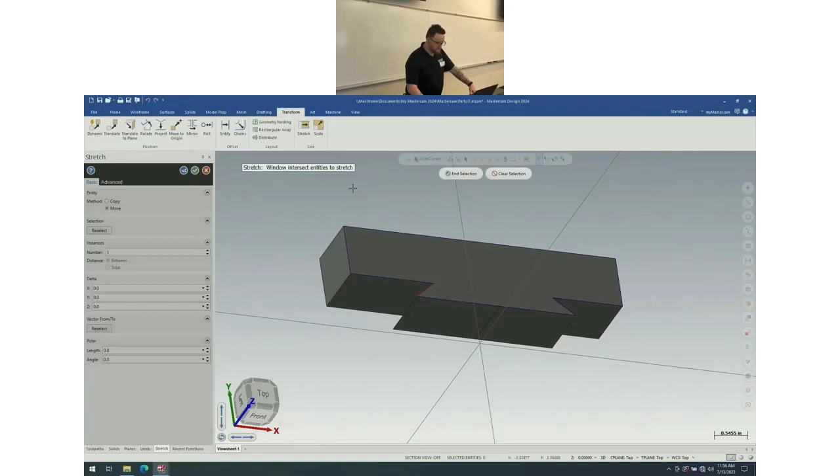But could you put the bottom piece on a process, coming in there with a 1/2-inch end mill cutting the part and then using the AB cutter to cut the dovetail, and make that a process? Then each time you have a different block, it would figure out how many cuts you need with the 1/2-inch end mill, and then finish it with the AB cutter.

Yes, absolutely. You could totally do that. It would take me a minute to build it, so we'll probably not do it right now, but it is a process that you could make where you basically have a toolpath tied to the solid.

And if the solid changes, the toolpath is associative to that, so it will regenerate. Yeah, that's kind of my workflow, and I was curious if you have the same problem. It definitely does do that. Yeah, it's been around for years. We've had solid associativity in toolpaths for longer than I've been doing this.

Yeah, the only thing you'd have to do is rechain whatever your furthest in point is of where you're going to drive your QC cutter or your dovetail cutter with. You'll just have to redefine that geometry. You wouldn't necessarily have to. It depends on your modeling process. So if your modeling process includes you shifting things as opposed to redrawing them, then it will still follow it even if you shift it around. So moving a contour doesn't break it from the selection. Correct.

Learn something new. Yeah, there's a lot that Mastercam can do with associativity. That was my number one concern, because I haven't touched Mastercam in 5 years or so, and I didn't have a lot of modeling involved with it, or at least that I was aware of when I was using it.

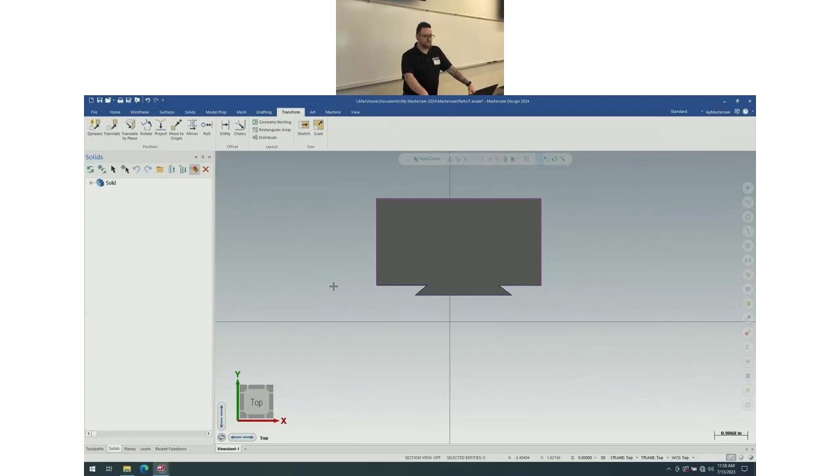I miss my 3D controller. I did not bring it with me today. Although the GView Cube is a great substitute, honestly.

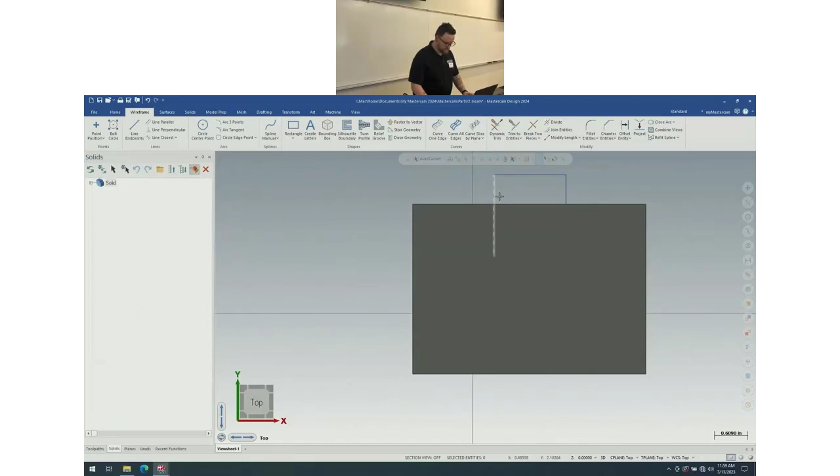Okay, so then I'm going to fillet chain just so it's nice and rounded. And then I'm going to solid extrude that guy down. We're going to do a cut. We're going to go halfway down. Okay. So then I'm going to create from the height, same as that, wireframe circle. I know that this takes a second here, but it'll show exactly what this can do, which is really good for family of parts and stuff like that. So this is going to be an add boss.

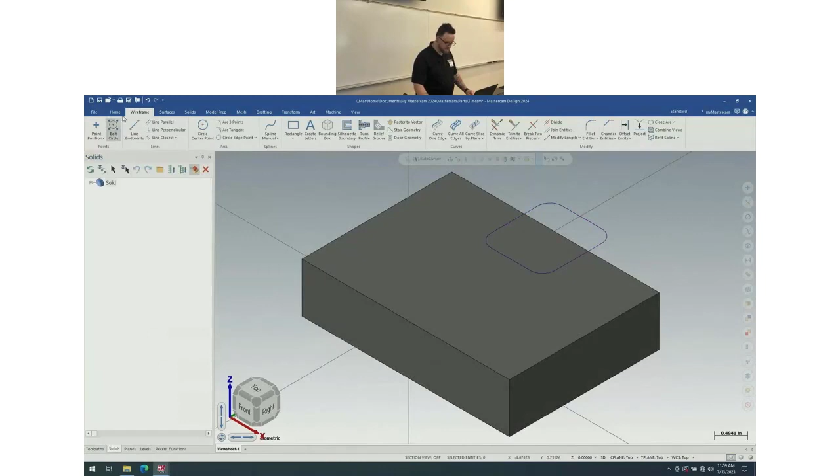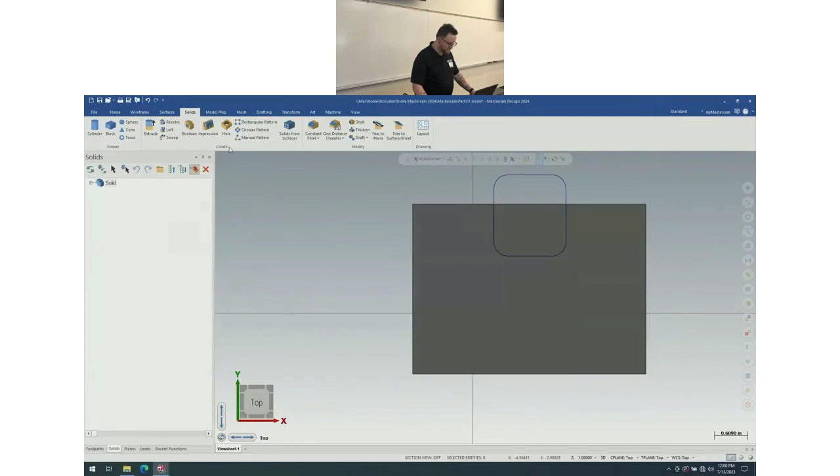Okay. So at this point, if I were to take a toolpath like a dynamic mill, and let's say I want my automatic region to be based on this from outside, and I'm going to grab a tool that's like a 1/4-inch flat end mill or something. Linking parameters, absolute, incremental, yeah. Let's set this to like 1 inch. Turn that off. Okay, so I've got a toolpath that's based on that pin being there in a pocket, right?

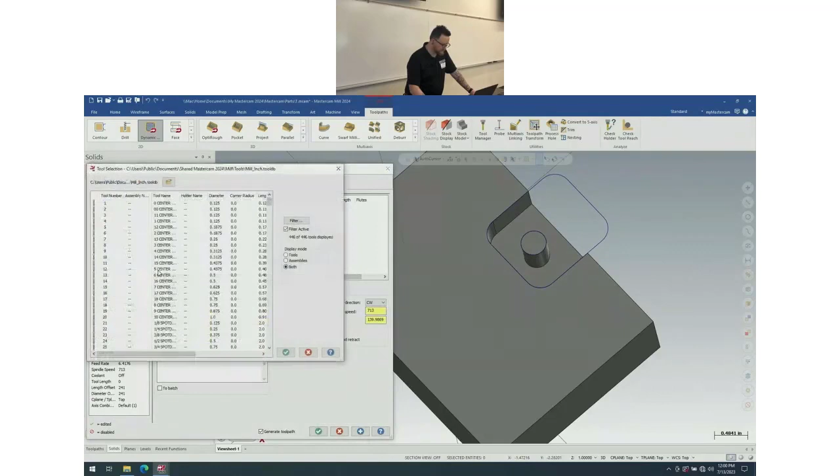Now, if I go to my model prep and I remove the history on this guy, or even if I take my wireframe and I use dynamic, if I shift this, let's say 1/8 of an inch that way, and 1/4 of an inch that way. So you can see my wireframe is moved. Hit the green check. Solid goes dirty. I regenerate that. Now the toolpath goes dirty, and now I can regenerate that.

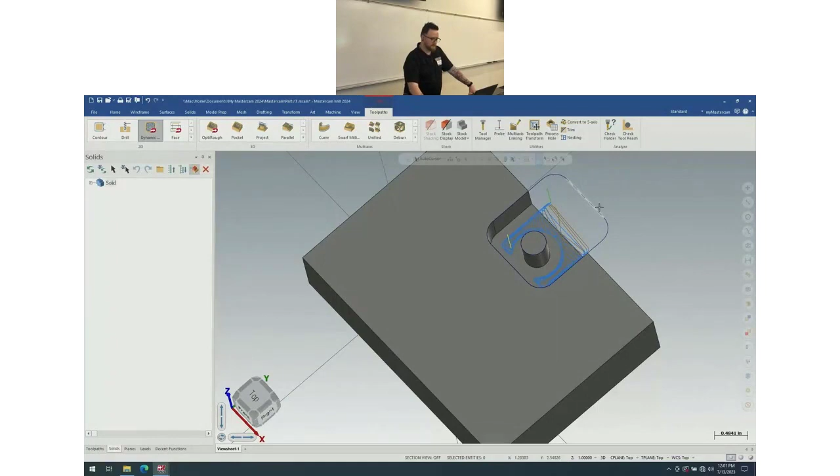So it's following the solid edges. The wireframe we use to define the solid, but the solid itself is what drives that toolpath. So there's some really cool tricks. This is the most basic way to think about it, right? But if you've got a lot of associativity going on, it doesn't really matter what changes in your part. The toolpath can compensate for it. Cool. Thank you. Does that answer your question? Yeah.

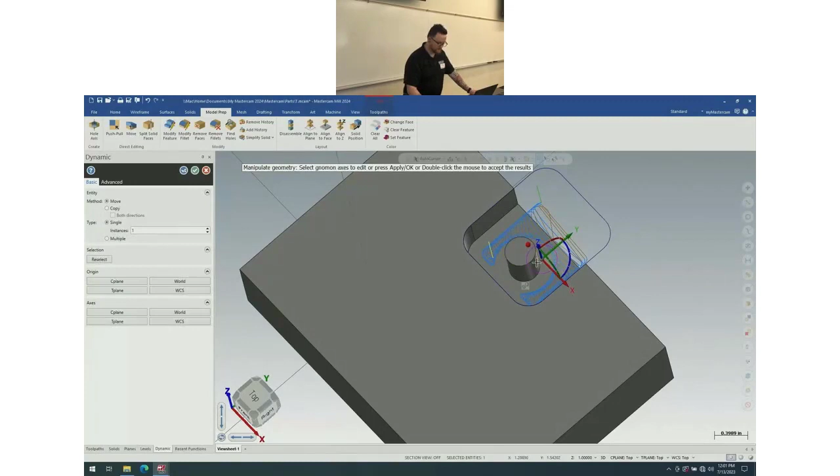Awesome. Anything else in chat? A lot of Spanish. A lot of Spanish? Do you read Spanish? No. Okay. Gary's taking care of it. Oh, yeah, he would. Awesome. All right. Did you guys have anything else for me? Are we ready to get some lunch? Yeah. I like sandwiches. So, did the lunch come in? Sweet. Okay, Kyler, if you want to just go back to the slides, and we'll wrap this up real quick. Oh, is that the last one? I forgot how I did it.